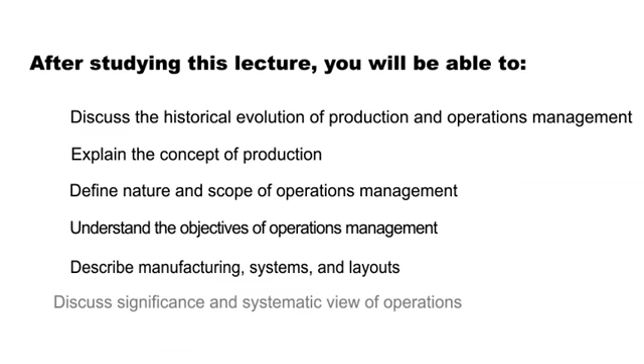After this lecture, we will be able to learn the following objectives: discuss the historical evolution of production and operation management, explain the concept of production, define nature and scope of operation management, understand the objectives of operation management, describe manufacturing systems and layouts, discuss significance and systematic view of operations, define the factors of production, and understand operation management as a multidisciplinary subject.

Let's start with the concept of production and operation management. Production or operation management is a process which combines and transforms various resources used in the production or operation subsystem of the organization into value-added products or services in a controlled manner as per the policies of the organization.

Therefore, it is that part of an organization which is concerned with the transformation of a range of inputs into the required products or services having the requisite quality level. The set of interrelated management activities involved in manufacturing certain products is called production management. If the same concept is extended to services management, then the corresponding set of management activities is called operation management.

Let us now understand the historical evolution of production and operation management. For over two centuries, operation and production management has been recognized as an important factor in a country's economic growth. The traditional view of manufacturing management began in the 18th century when Adam Smith recognized the economic benefits of specialization of labor. He recommended breaking jobs down into sub-tasks and assigning workers to specialized tasks in which they would become highly skilled and efficient.

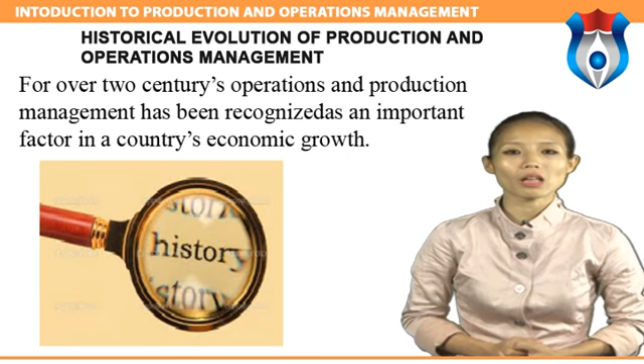In the early 20th century, F.W. Taylor implemented Smith's theories and developed scientific management. Workers were studied in great detail to eliminate wasteful efforts and achieve greater efficiency. At the same time, psychologists, sociologists, and other social scientists began to study people and human behavior in the working environment. In addition, economists, mathematicians, and computer scientists contributed newer, more sophisticated analytical approaches.

With the 1970s emerged two distinct changes in our views. The most obvious of these, reflected in the new name operation management, was a shift in the service and manufacturing sectors of the economy. As the service sector became more prominent, the change from production to operations emphasized the broadening of our field to service organizations. The second, more subtle change was the emphasis on synthesis rather than just analysis in management practices.

Now moving on to the next topic, we will study the concept of production. Production function is that part of an organization which is concerned with the transformation of a range of inputs into the required outputs, products, having their requisite quality level.

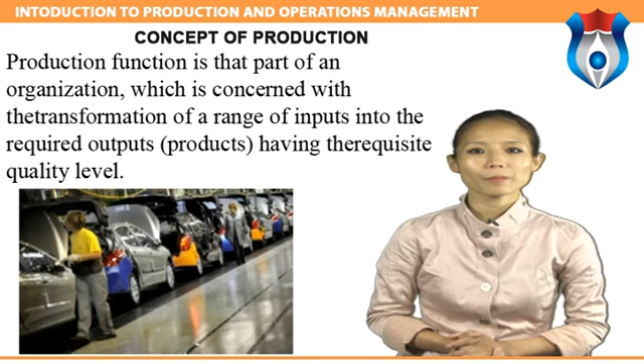Production is defined as a step-by-step conversion of one form of material into another form through chemical or mechanical process to create or enhance the utility of the product to the user. This production is a value addition process. At each stage of processing, there will be value addition.

Classification of production system: production systems can be classified as job shop, batch, mass, and continuous production systems.

Job shop production is characterized by manufacturing one or few quantities of products designed and produced as per the specification of customers within prefixed time and cost. The distinguishing feature of this is low volume and high variety of products. A job shop comprises general purpose machines arranged into different departments. Each job demands unique technological requirements and processing on machines in a certain sequence.

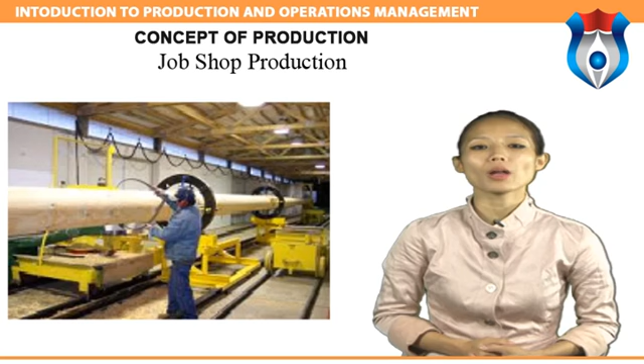The job shop production system is followed when there is high variety of products and low volume, use of general purpose machines and facilities, highly skilled operators who can take up each job as a challenge because of its uniqueness, and large inventory of materials, tools, and parts. Detailed planning is essential for sequencing the requirements of each product, capacities for each work center, and other priorities.

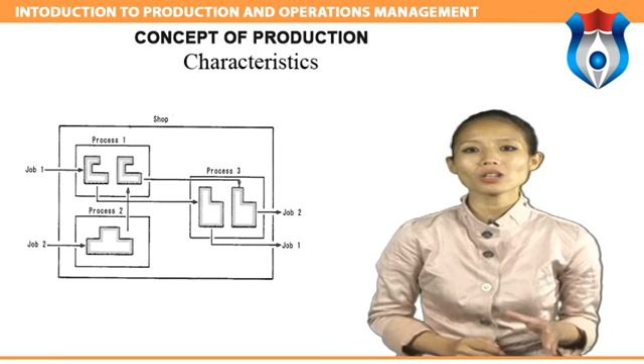Advantages of job shop production: because of general purpose machines and facilities, a variety of products can be produced. Operators become more skilled and competent as each job gives them learning opportunities. Full potential of operators can be utilized. Opportunity exists for creative methods and innovative ideas.

Now let's look at the limitations of job shop production: higher cost due to frequent setup changes, higher level of inventory at all levels and hence higher inventory costs, complicated production planning, and larger space requirements.

Batch production is defined by the American Production and Inventory Control Society (APICS) as a form of manufacturing in which the job passes through the functional departments in lots or batches, and each lot may have a different routing.

It is characterized by the manufacture of a limited number of products produced at regular intervals and stocked awaiting sales.

Batch production system is used under the following circumstances: when there are shorter production runs, when plant and machinery are flexible, when plant and machinery setup is used for production of an item in a batch and a change of setup is required for processing the next batch, and when manufacturing lead time and costs are lower as compared to job order production.

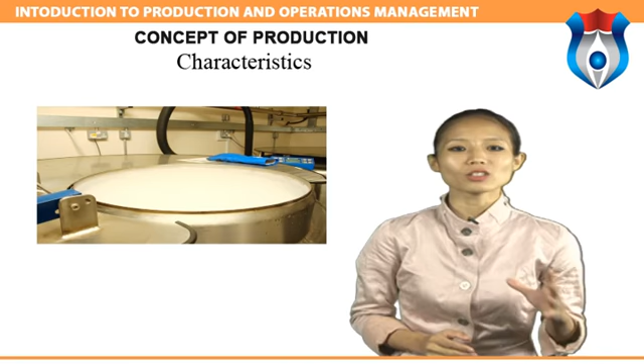The advantages of batch production are: better utilization of plant and machinery, promotes functional specialization, cost per unit is lower as compared to job order production, lower investment in plant and machinery, flexibility to accommodate and process a number of products, and job satisfaction for operators.

Let's look at the limitations of batch production. Material handling is complex because of irregular and longer flows. Production planning and control is complex. Work in process inventory is higher compared to continuous production.

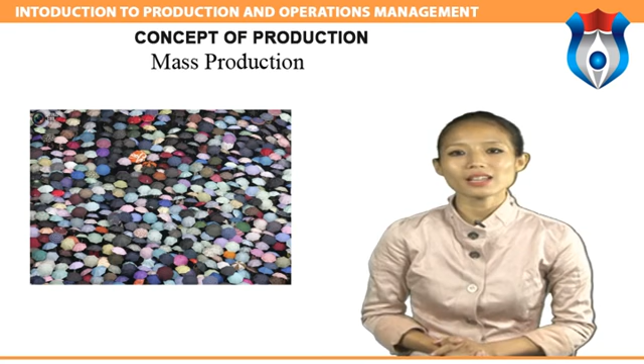Mass production: the manufacture of discrete parts or assemblies using a continuous process is called mass production. This production system is justified by a very large volume of production. The machines are arranged in a line or product layout. Product and process standardization exists, and all outputs follow the same path.

Mass production is used under the following circumstances: standardization of product and process sequence, dedicated special purpose machines having higher production capacities and output rates, large volume of products, shorter cycle time of production, lower in-process inventory, and perfectly balanced production lines.

The advantages of mass production are: higher rate of production with reduced cycle time, higher capacity utilization due to line balancing, and less skilled operators are required.

The limitations of mass production are: breakdown of one machine will stop an entire production line, line layout needs major change with changes in product design, and there is high investment in production facilities.

Continuous production: production facilities are arranged as per the sequence of production operations from the first operation to the finished product. The items are made to flow through the sequence of operations through material handling devices such as conveyors, transfer devices, etc.

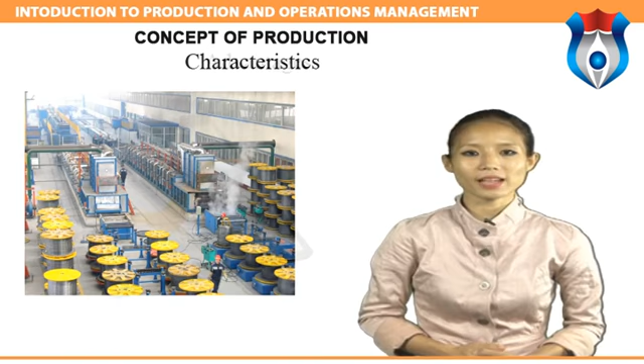Continuous production is used under the following circumstances: dedicated plant and equipment with zero flexibility, material handling is fully automated, the process follows a predetermined sequence of operations, and component materials cannot be readily identified with the final product.

Let's look at the advantages of continuous production: standardization of product and process sequence, higher rate of production which reduces cycle time, higher capacity utilization due to line balancing, and manpower is not required for material handling as it is completely automatic.

The limitations of continuous production are: flexibility to accommodate and process a number of products does not exist, very high investment is needed for setting up flow lines, and product differentiation is limited.

Now we will discuss the nature and scope of operations management. Operations management is often used along with production management in literature on the subject. It is therefore useful to understand the nature of operations management. Operations management is understood as a process whereby resources or inputs are converted into more useful products.

A second reading of this sentence reveals that there is hardly any difference between the terms production management and operations management. Production management precedes operations management in the historical growth of the subject. These two distinctions notwithstanding, the terms production management and operations management are used interchangeably.

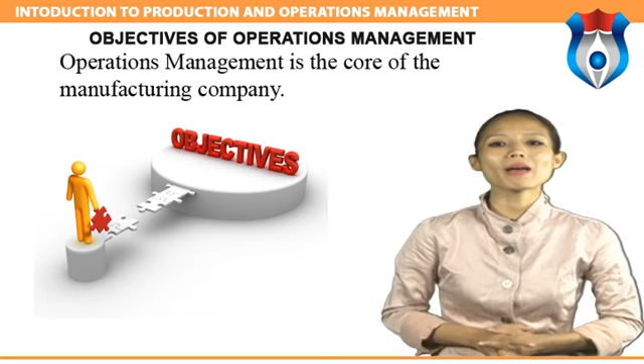Let us know the objective of operation management. Operation management is the core of the manufacturing company. It is a combination of various disciplines. Operation management, often called production management, includes ten things.

Design of goods and services is associated with quality and human resources. Quality: product quality must be maintained during the construction process of products, goods or services. The design process and capacity.

Designing processes and capacities are related to quality, human resources, inventory, scheduling and maintenance. Site selection: the choice of location is associated with supply chain management. Design layout: the design layout is done after the design process and capacity.

Human resources: HR and design work. HR factors include safety, health, job description, work environment and wages. Supply chain management is influenced by site selection and product quality.

Inventory: inventory decisions are influenced by design processes and capacity, human resources and design layout. Scheduling: scheduling decisions are influenced by the design process and capacity, layout and HR. Maintenance is associated with maintaining the quality of qualities.

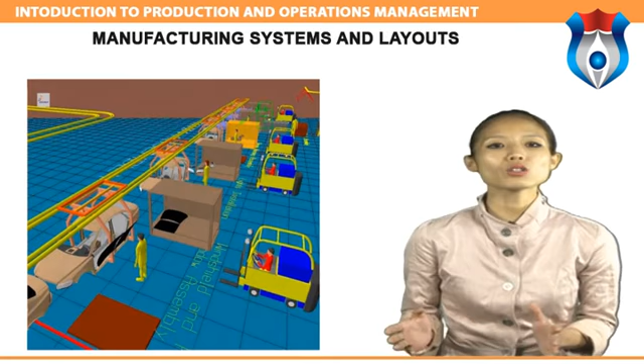Let us now talk about the manufacturing system and layouts. Manufacturing is an organized activity devoted to the transformation of raw materials into marketable goods. The manufacturing system usually employs a series of value-adding processes to convert raw materials into more useful forms and eventually into finished products. In an industrialized country, manufacturing industries are the backbone of the national economy because it is mainly through their activities that real wealth is created.

Manufacturing system management is a discipline built upon a collection of methodological tools brought together to effect an integrated or total approach to problem solving in manufacturing, engineering and management, with productivity improvement as its overall objective. Layouts: in manufacturing, facility layout consists of configuring the plant site with lines, buildings, major facilities, work areas, aisles and other pertinent features such as department boundaries.

Process layout: process layouts are found primarily in job shops or firms that produce customized, low-volume products that may require different processing requirements and sequences of operations. Process layouts are facility configurations in which operations of a similar nature or function are grouped together.

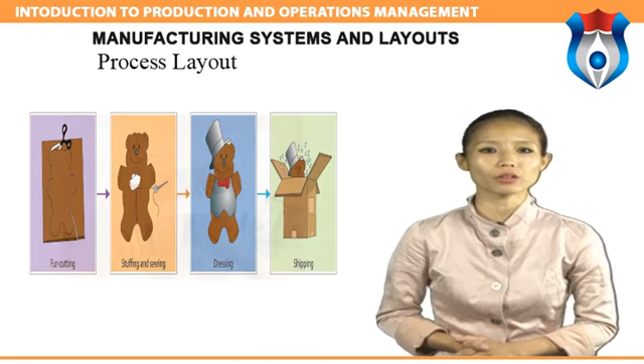Improving process layout involves the minimization of transportation cost, distance or time. To accomplish this, some firms use what is known as a Muther grid, where subjective information is summarized on a grid displaying various combinations of department, work group or machine pairs.

Advantages of process layout include flexibility. The firm has the ability to handle a variety of process requirements. Cost: the general purpose equipment utilized may be less costly to purchase and easier to maintain than specialized equipment. Motivation: employees in this type of layout will probably be able to perform a variety of tasks on multiple machines, as opposed to the boredom of performing a repetitive task on an assembly line.

Cost: if batch processing is used in process, inventory costs could be high. Lower volume means higher per unit cost. More specialized attention is necessary for both products and customers. Confusion: constantly changing schedules and routines make juggling process requirements more difficult.

Product layout. Product layouts are found in flow shops, repetitive assembly, and process or continuous flow industries. Flow shops produce high volume, highly standardized products that require highly standardized repetitive processes. Two types of lines are used in product layouts: paced and unpaced.

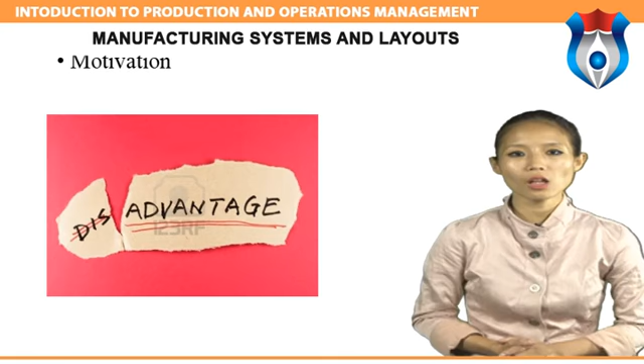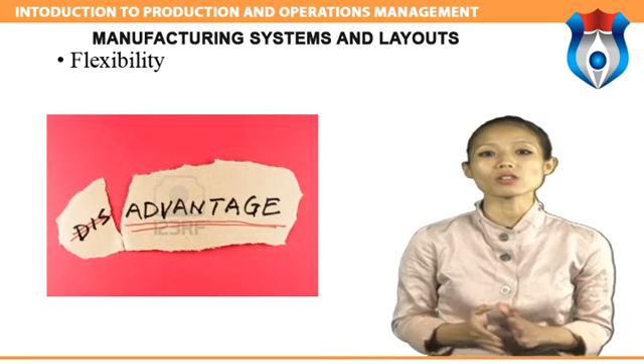Utilization: there is a high degree of labor and equipment utilization. Disadvantages of product layout include motivation. The system's inherent division of labor can result in dull, repetitive jobs that can prove to be quite stressful. Also, assembly line layouts make it very hard to administer individual incentive plans. Flexibility: product layouts are inflexible and cannot easily respond to required system changes, especially changes in product or process design.

Fixed position layout: a fixed position layout is appropriate for a product that is too large or too heavy to move. For example, naval ships are not produced on an assembly line. For services, other reasons may dictate the fixed position, for example a hospital operating room where doctors, nurses and medical equipment are brought to the patient. Other fixed position layout examples include construction, such as buildings, dams and electric or nuclear power plants; shipbuilding; aircraft; aerospace; farming; drilling for oil; home repair; and automated car washes.

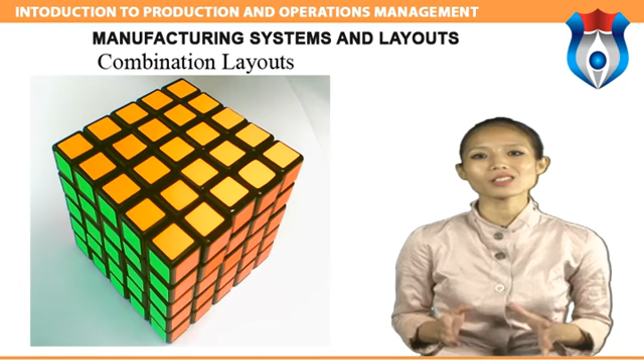Combination layouts: many situations call for a mixture of the three main layout types. These mixtures are commonly called combination or hybrid layouts. For example, one firm may utilize process layout for the majority of its process along with an assembly line in one area. Cellular layout: cellular manufacturing is a type of layout where machines are grouped according to the process requirement for a set of similar items.

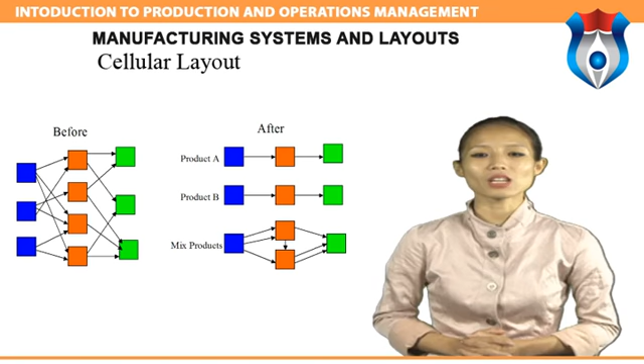Part families require similar processing, and these groups are called cells. Therefore, a cellular layout is an equipment layout configured to support cellular manufacturing. Workers in cellular layouts are cross-trained so that they can operate all the equipment within the cell and take responsibility for its output.

In addition to the aforementioned layouts, there are others that are more appropriate for use in service organizations. These include warehouse or storage layouts, retail layouts and office layouts. With warehouse or storage layouts, order frequency is a key factor. Items that are ordered frequently should be placed close together near the entrance of the facility, while those ordered less frequently remain in the rear of the facility.

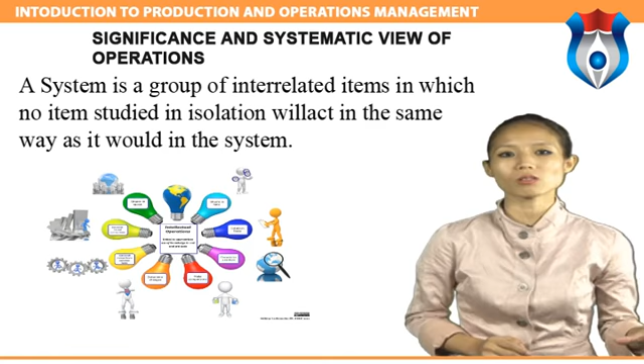Now we will study the significance and systematic view of operation. A system is a group of interrelated items in which no item studied in isolation will act in the same way as it would in the system. A system is divided into a series of parts or subsystems, and any system is a part of a larger system.

Systematic view of operation: the system boundary defines what is inside the system and what is outside. A system environment is everything outside the system boundary that may have an impact on the behavior of the system. A system's inputs are the physical objects or information that enter it from the environment, and its outputs are the same which leave it for the environment.

Significance of operation management. Operation management refers to the complex set of management activities involved in planning, organizing, leading, and controlling an organization's operations. At one time, operation management was considered the backwater of management activities, a dirty, drab necessity.

Let's now look at how to improve productivity. Productivity, the ratio of output to input, is a measure of a manager's or an employee's efficiency in using the organization's scarce resources to produce goods and services. The higher the numerical value of this ratio, the greater the efficiency.

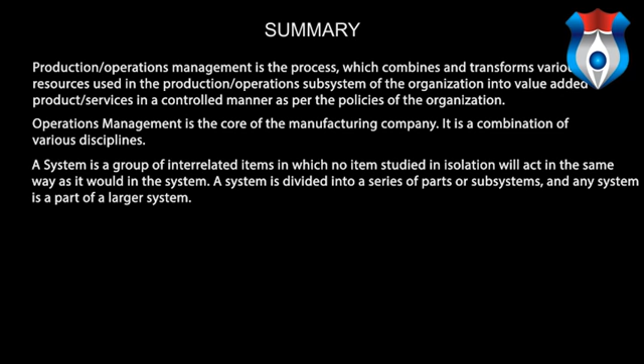same way as it would in the system. A system is divided into a series of parts or subsystems, and any system is a part of a larger system. Productivity, the ratio of output to input, is a measure of a manager's or an employee's efficiency in using

the organization's scarce resources to produce goods and services. Operation management refers to the complex set of management activities involved in planning, organizing, leading, and controlling an organization's operations.